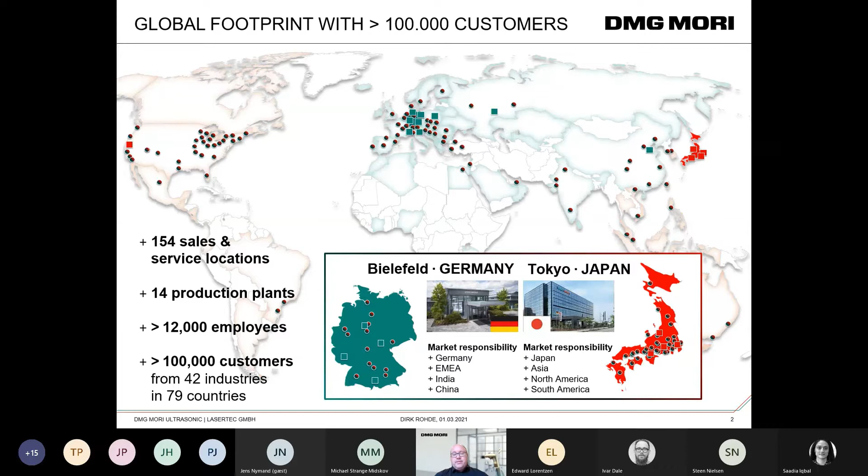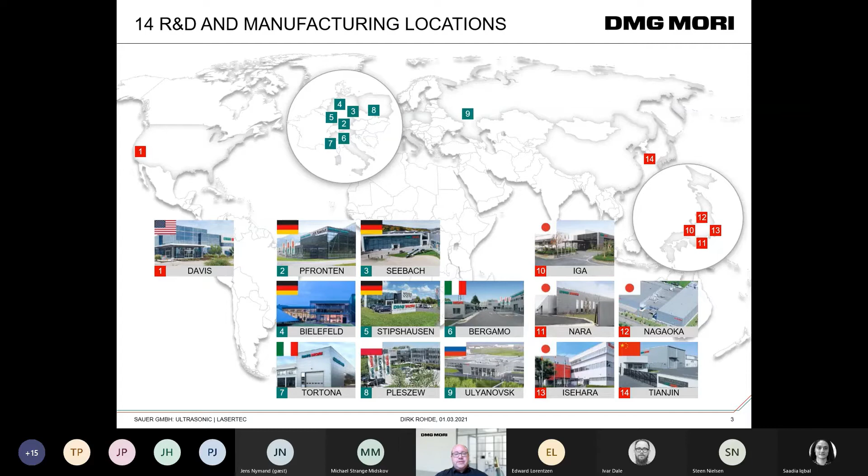Over 12,000 employees, over 100,000 customers, and many R&D centers for the different technologies for milling, turning, additive manufacturing, ultrasonic, SLM, and of course the DED technology, which is the laser tech fraction that is based in Pfronten in southern Germany.

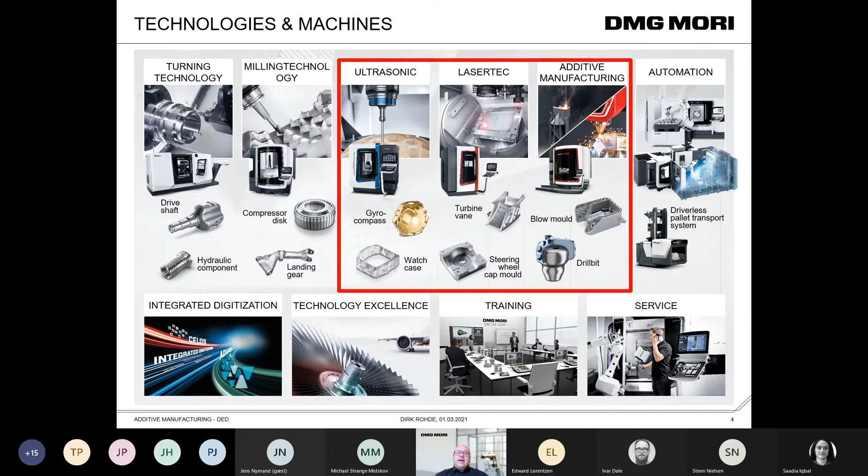In Pfronten, we do not only work for or with DED. We have many different laser machines in our portfolio. It's power drilling, it's shaping for texturing surfaces. It is a precision tool in which we finish PCD or CBN tools with a laser, as well as, of course, the DED technology.

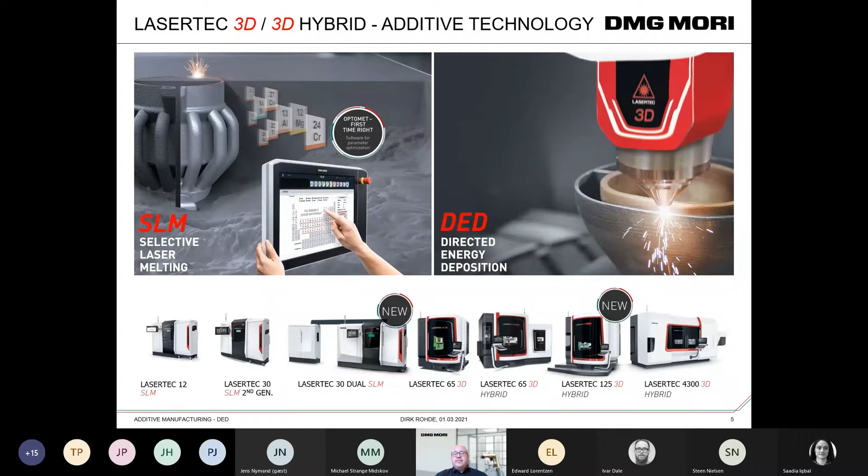For everybody who does not really know about the process, SLM is where you have a powder bed, typically the laser on top, and you have a 2D process. You weld layer per layer and add new powder to it. That is for very, very fine and detailed structures, but typically not for big parts. And you are hooked up to only one powder because you have the powder bed.

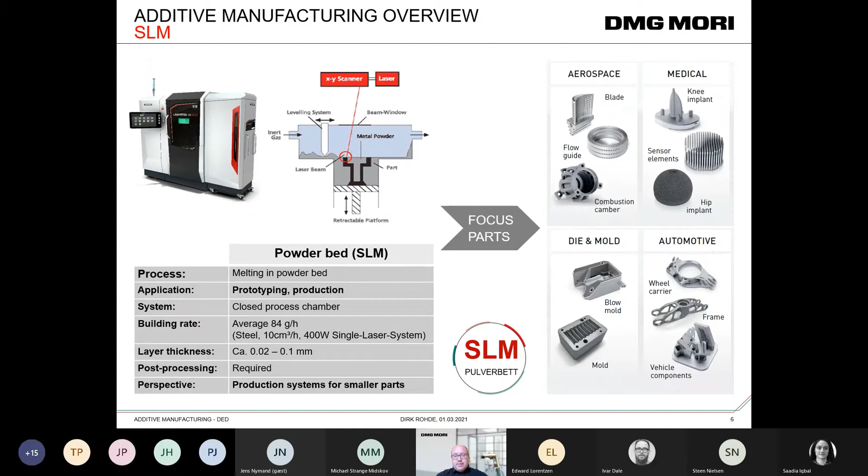The DED works differently. You have kind of a nozzle head in the center. You have the laser to bring the heat to result in a melt pool. There you blow the powder onto the melt pool, and that is more or less covered by a shield gas. So that's a laser welding process.

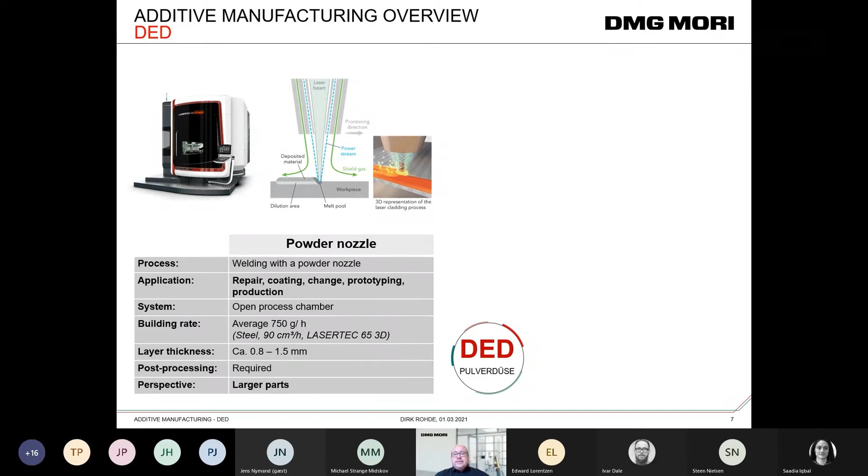Available in many different applications, later on there are robot applications available. Some have more the size of the part in focus. We focus more on the hybrid background of it. Hybrid means additive and subtractive in a wild mix. So first subtractive, clean destroyed areas, add material, and in the third step you finish the added material.

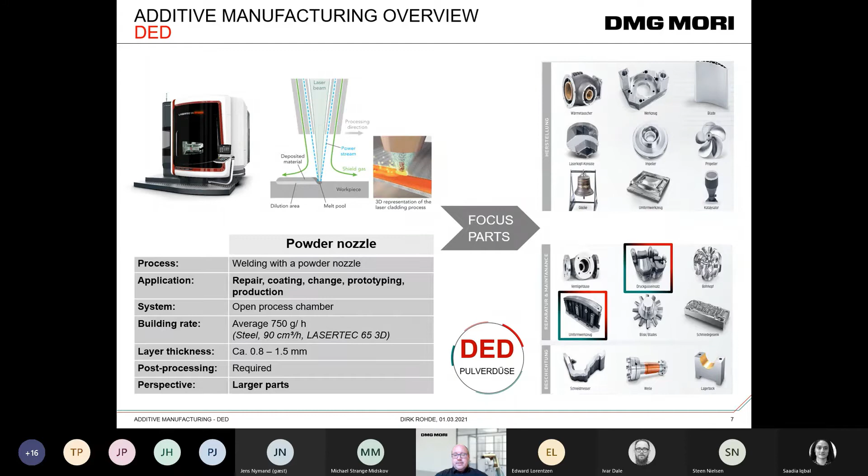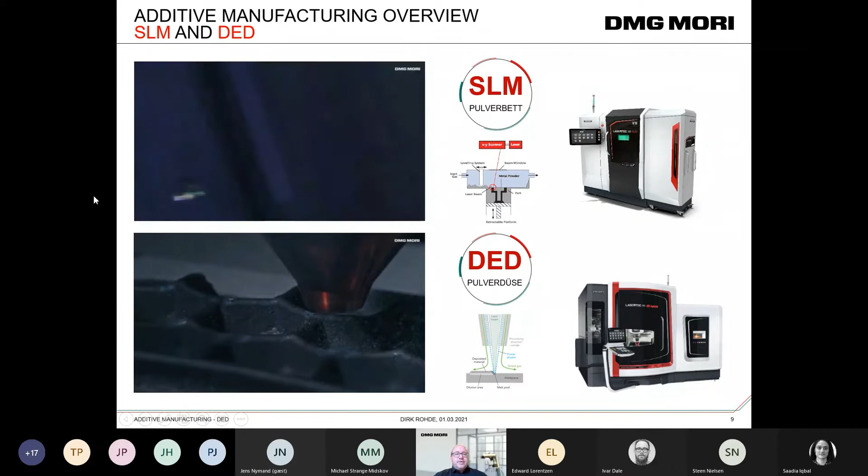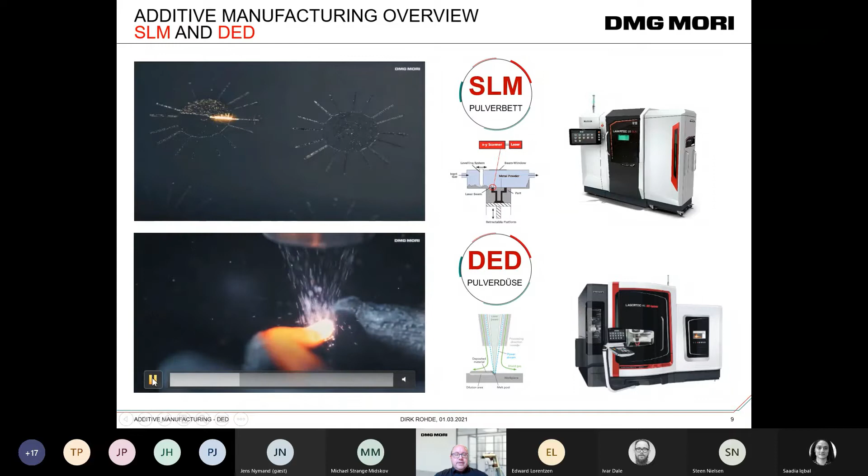Here's this typical SLM process where you add powder layer per powder layer, and then you weld the powder with the laser from the top. And this is the DED application where you really have a laser welding process where you shoot or blow the powder onto the melt pool and build your parts.

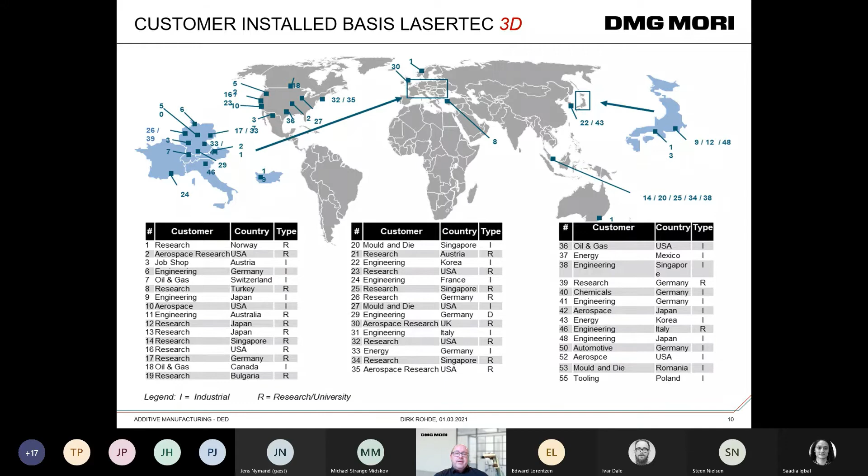DED is not a developing status anymore. This overview is a little bit over a year old. Right now we are at over 80 installed machines worldwide as a basis. The first customers, of course, were universities and research and development centers, but it's now definitely in the industry, and it's a weapon. You will see that later for every quick repairs, fine details, print out.

Here are 3 of 5 available Lasertec DED machines. They are all based on our 5-axis milling machines. So the hybrid, Lasertec 65 3D hybrid and Lasertec 125 hybrid, they are fully capable 5-axis milling machines with absolutely no restrictions or limits or no differences compared to a standard milling machine. That's a DMU 65 monoblock or a DMU 125 monoblock machine. Who knows our machines? We simply add the DED technology.

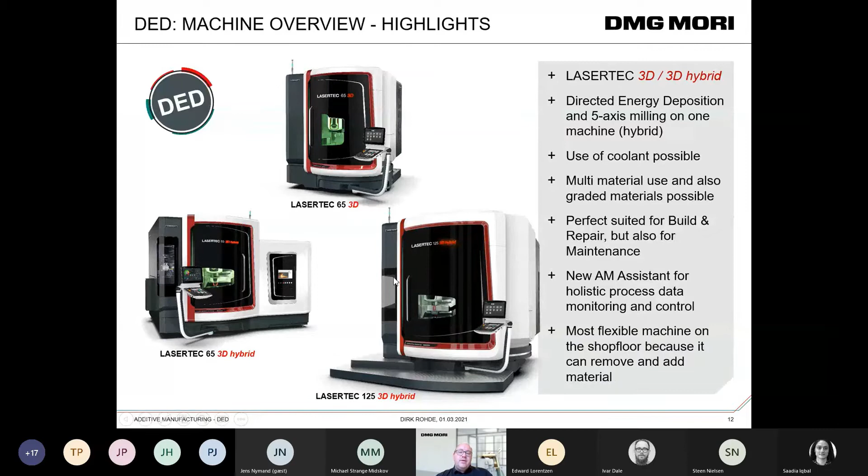On the right hand here, you see the attachment, because the machine housing itself is not big enough to cover the full laser head with the transfer module in there and the powder storage and everything. But the 125 is big enough that it was possible to locate everything in the original housing of the machine.

Working areas: hybrid 400 millimeters height, it's a little bit less than the DED only. This is a non-hybrid machine, it's only for DED works. That's resulting due to the laser head, we have a little bit reduced height and a 500 millimeter diameter roughly. And the Lasertec 125 is almost 750 and has 1250 millimeters in diameter, up to 2 tons.

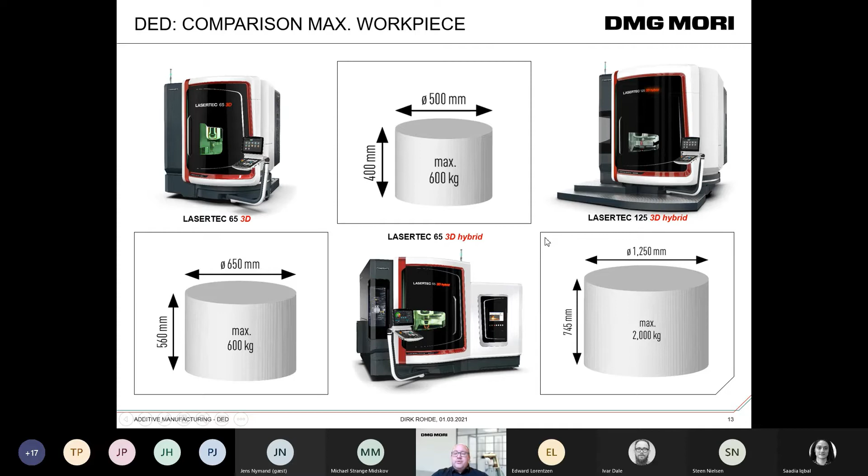We also have, that's brand new now, a first installation these days running in the United States. That's a turn mill center, up to 6 meters between the spindles, with a maximum diameter of 1070 millimeters. This machine, you see the relation or the ratio between the operator shown on the panel and the machine size, this is really, really big.

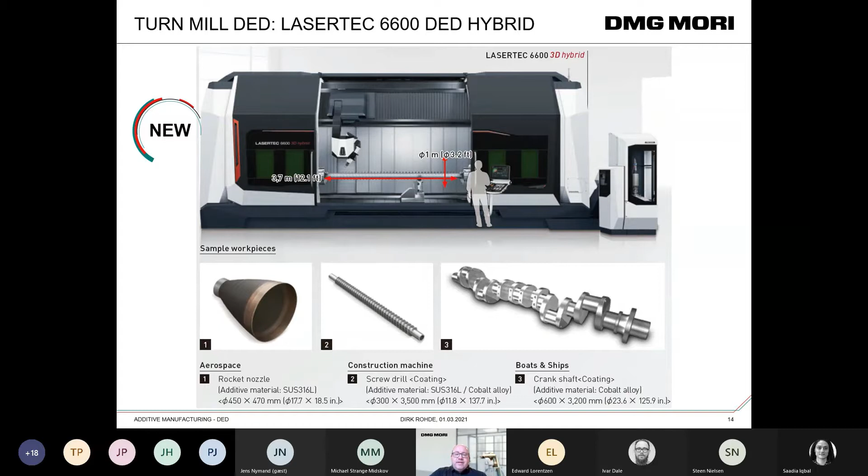Right now we see the focus on coatings, on shafts, every kind of shafts and crankshafts and whatever is long and requires a coverage. And this summer there's a new one upcoming, located between the 125 and the 6600. Few rough numbers - we have a world premiere in 3 months, so right now we do not show much more about it.

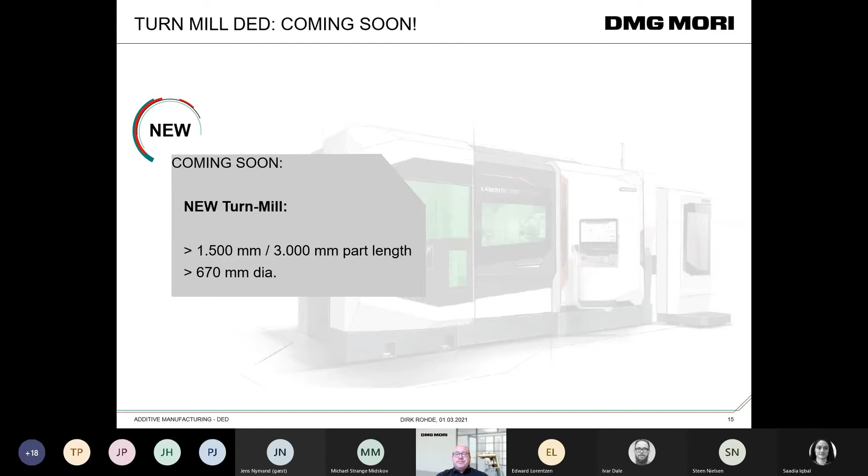Before we have a look at what the machines are used for, the use cases, I would like to point out a very important portion of this DED technology to make it capable of usage in your industrial environment.

The machine, the Lasertec 65, was presented in 2013 already, but over the last 7.5 years we found out that there are some minor mistakes which result in a bad part at the end. Now we are in a situation that we have almost everything monitored in the machine itself, and mainly it is all around the powder.

What we have is a powder mass flow calibration unit with a little scale in the back. So the machine is asked to, for example, feed 50 grams of powder, and we feed the powder and the scale is automatically weighing it and reflects the result back to the machine, so the powder flow is self-calibrated.

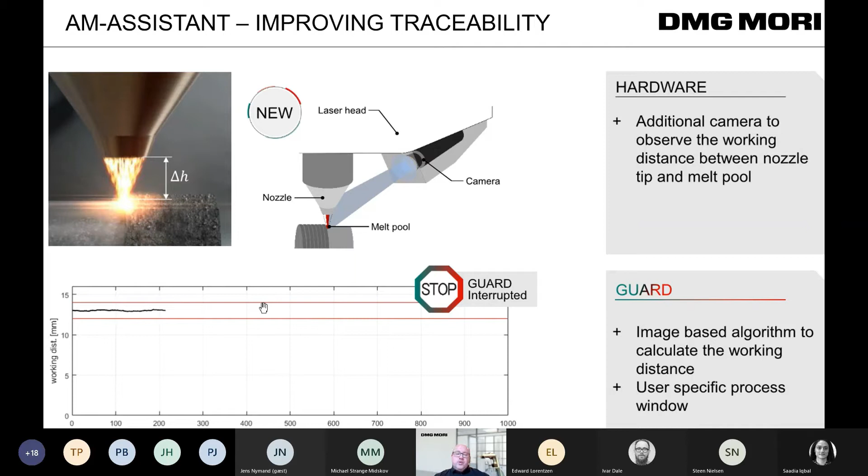Then we have the so-called working distance monitoring. You see here in the screen, I can zoom this up a little bit. When you add material, you can program this, which in this case is Siemens NX. You tell the machine, okay, with every layer you have an increase of, let's say, 1 millimeter. But if this is not right, and you have a full print of a part 200 millimeters high, and with every millimeter you have an additional 0.1 millimeter, after 100 layers you are way out of range. So the part grows toward the nozzle, and you do not have the melt pool anymore that you want. That's why the distance is controlled and monitored, and runs within a certain range, let's say between 12 and 14 millimeters. If it runs out of that, we assume that this is a mistake, and the machine will stop for safety reasons.

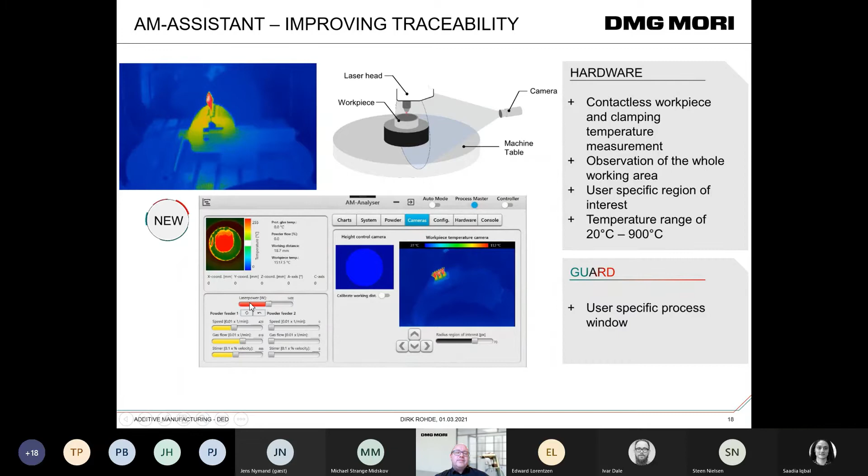And we have melt pool monitoring with a self-adjusting leveling of the machine during the process, and you can every time adjust your speed, your gas flow, as well as your laser power on the operator panel during the process.

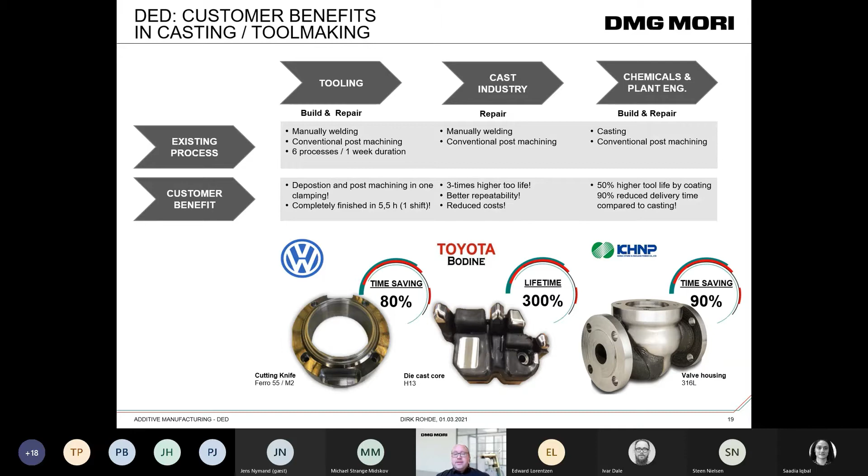Here are some samples for tooling. The cast industry, especially die cast industry, is extremely interesting for that, and as well chemical plants, etc. See, this valve housing is made for a chemical company. They have plants all over the world. Some of these housings are over 40 years old. Everybody knows these housings, and there are no casts available anymore, no drawings, nothing.

Old standard seals in there - everything was custom. So what they do is scan where it sits, and they have the distance between the flanges. They know the fixing points, and the rest of it they redesign based on standard industry norms, and simply print the same flanges and actualize the rest of the valve. This is a full print on the machine, in this case very special because it's a mix of additive and subtractive work. See it here in the right bottom, how it builds up from top down.

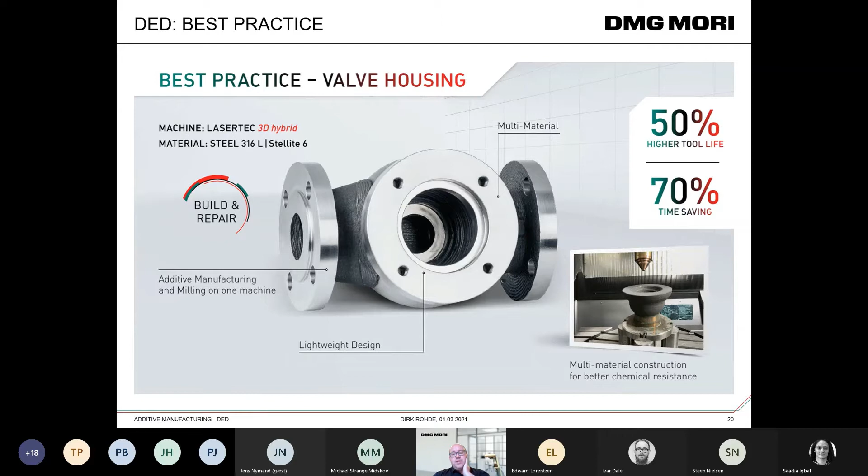Print time of this part is almost 30 kilograms, and it's 56 hours. So within 2 days you have a new machined valve as a replacement.

This one is extremely fast. It's a cutter knife repair setup on the machine. They print the soft base with the tool steel ferro 44, which comes out at 44 Rockwell, and then you have a so-called M2, a high-speed cutting steel. Typically you cannot weld high-speed cutting steels, but it's available as a powder and works great in the machine. So we have a 2 millimeter layer hard cover on this knife that comes out of the machine at 63 Rockwell, ready for installation back into the tool.

Total print time of this part here, including the hard coverage and machining, is 5.5 hours. So you get completely away from this machine tourism where you machine the destroyed sections off and move it to the next machine or the hand welding shop, then relax or stress relieve it and finish it. It typically takes this customer 3 to 4 days for replacement; with this case, it's replaced in less than a shift and ready for assembly.

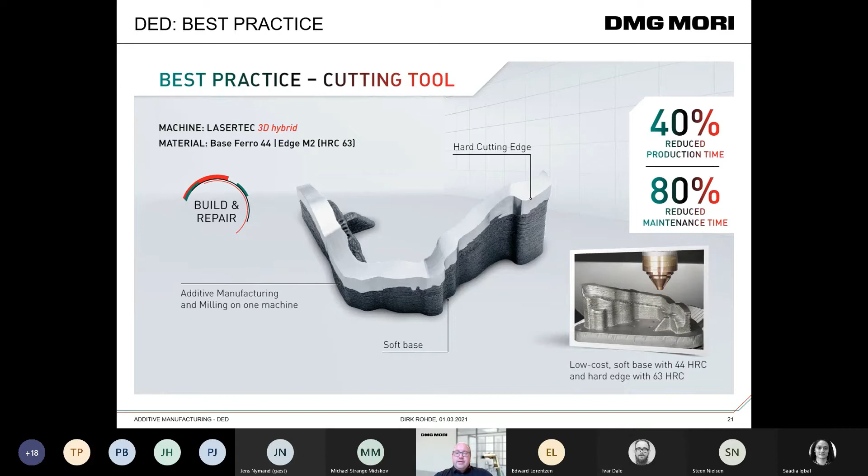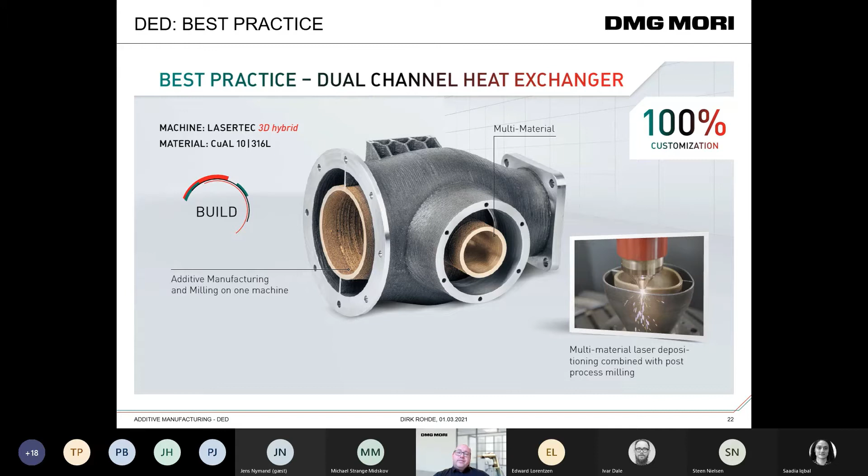This is a part we developed on our own, a tube in tube — one of the best samples. This technology is capable of handling, in standard, 2 different materials. Compared to SLM, where you have one big powder bed and cannot mix the powder, here we blow the powder to the nozzle, and due to this blowing process we can make a clean shot and then switch the valve to feed a second powder to the nozzle. So here you have a mix of stainless steel and bronze in the middle. It's a great combination, and right now we are able to mix up to 4 different materials. A few slides later I can show why it might be interesting to use a powder mix.

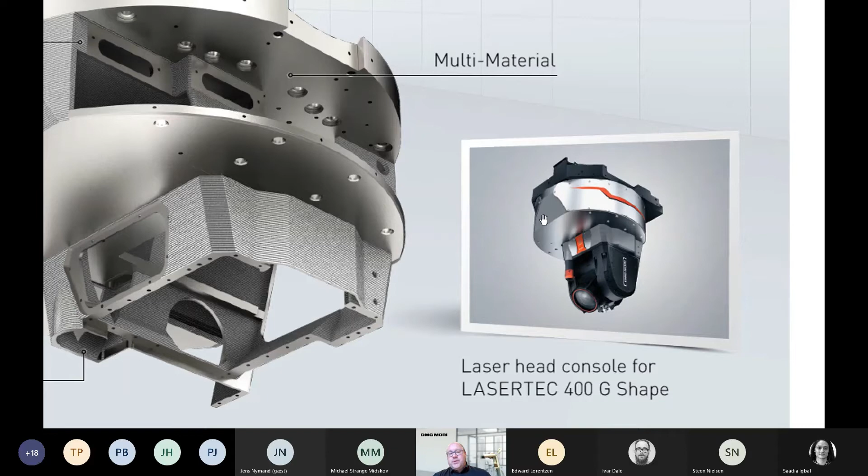This is a part we printed for one of our own machines, a Lasertec 400G shape machine for texturing molds, surface texturing of molds. We print everything you see here, and our build plate is the big base plate. On the right bottom you see the finished part. We keep it with a rough surface, as you can see, because it's our own product too, so it gives us a little advertisement and coverage. But the intention was to have a lightweight, very functional machine part to carry the laser optics on the machine, on the spindle position.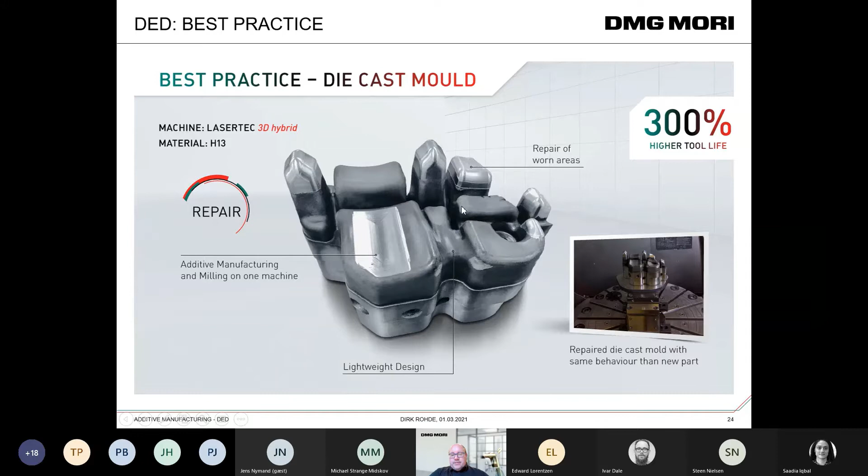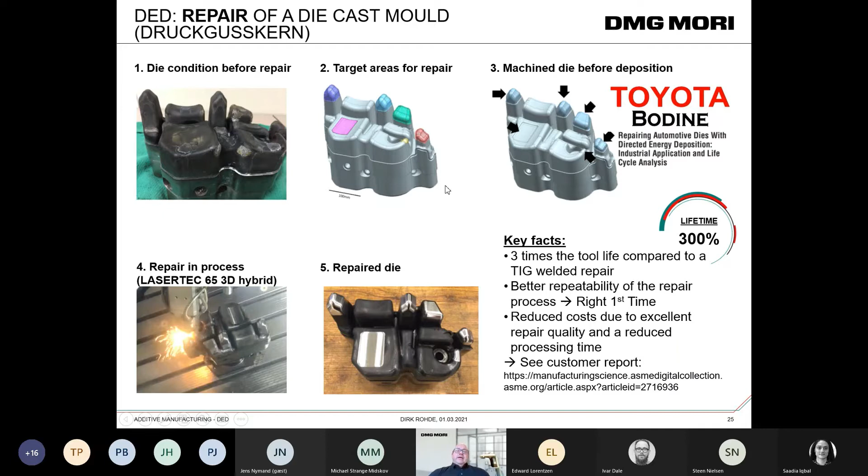This is one of the most interesting parts for repairs: die cast molds, die cast cores, and everything. The core comes used into the machine — top left is a used part. We focus on the sections where the highest wear of the part is. We get the surface material up to 3 millimeters off, add the material, replace the used and broken sections, and finish it in the machine. It's an extremely fast, highly reliable repair of these molds in one shot, one machine, with only one clamping position. It saves so much time, and due to that so much cost, plus the possibility of using a harder material than the core is itself typically. We work here with M2, 63 Rockwell, giving 3 times higher lifetime of the part.

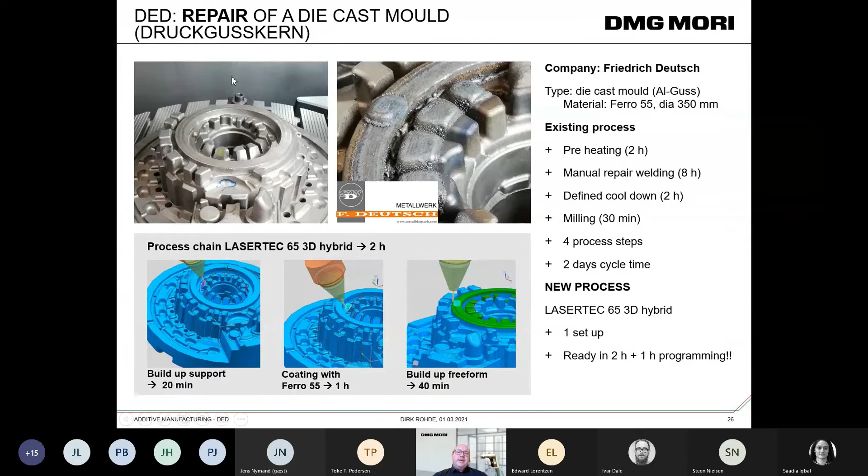In this case, you have a die-cast core with used sections, and what you see here is that we subtract — we mill the used sections away, then add the material and finish it in one machine. The existing process is preheating for manual repair welding, then cool down, milling again, a total loss of 2 days to repair this core. On our machine you have only one setup: you put the core in, machine it off, weld it, have a few minutes cool down, and finish it in the milling process. Why is preheating not necessary? The heat impact of the laser is such a small dot that the overall heat impact on the part is very little, so you typically don't have too much stress, compared to manual repair welding, which is also very rough — you weld big areas, lose many details, and everything has to be machined off again.

This is the same, probably better shown in the pictures. Top left in red is the focused item that has to be replaced. Top right you see this empty space — this rib has been removed by a milling tool. Then we add the item again, and bottom right there's a finished section with a fully repaired rib in this tool. This company, Friedrich Deutsch, is located in Eastern Austria, and only for die-cast repairs they have had, since last year, 3 Lasertec 65 machines to do exactly what you see in these photos.

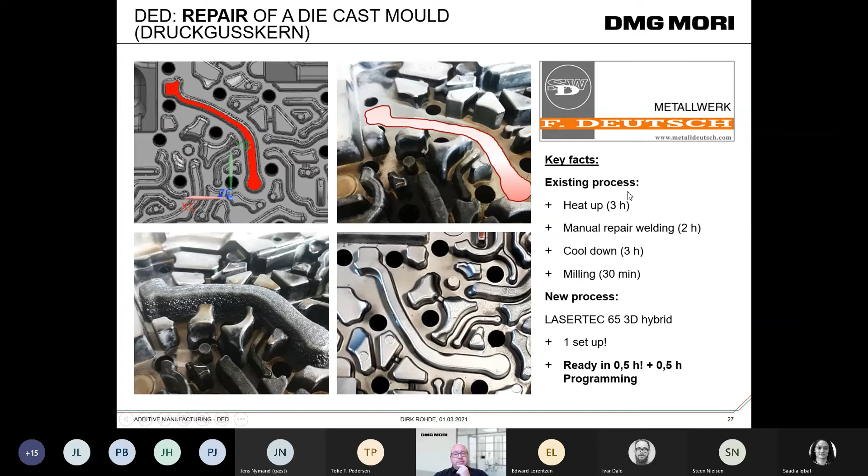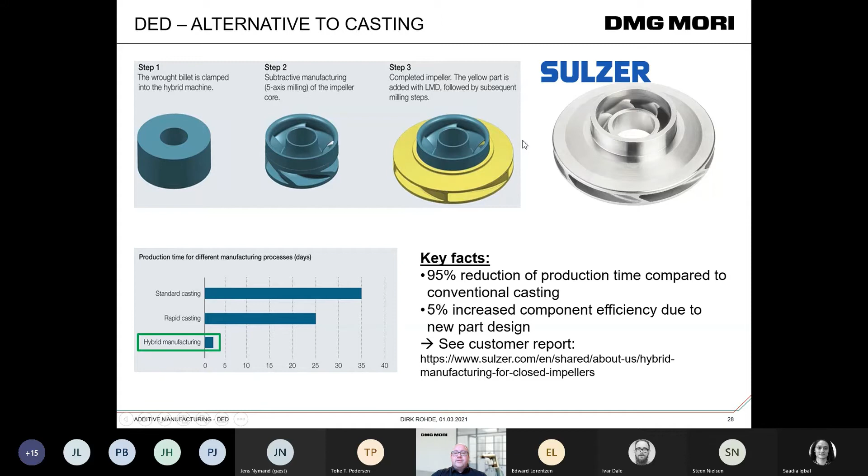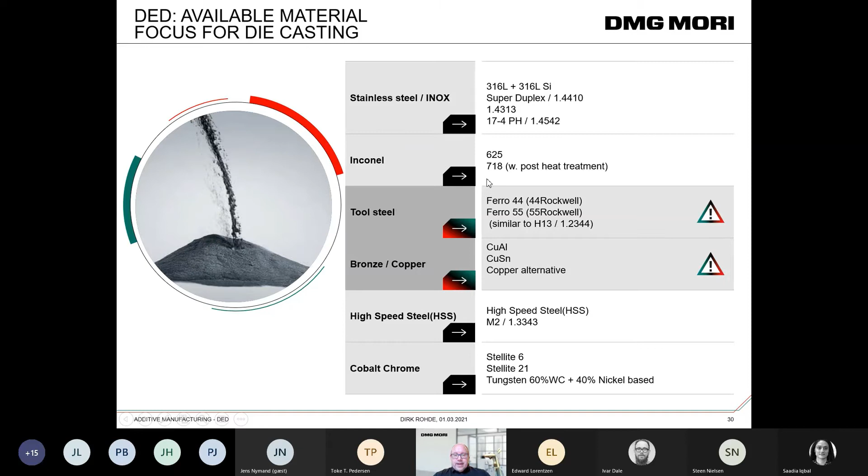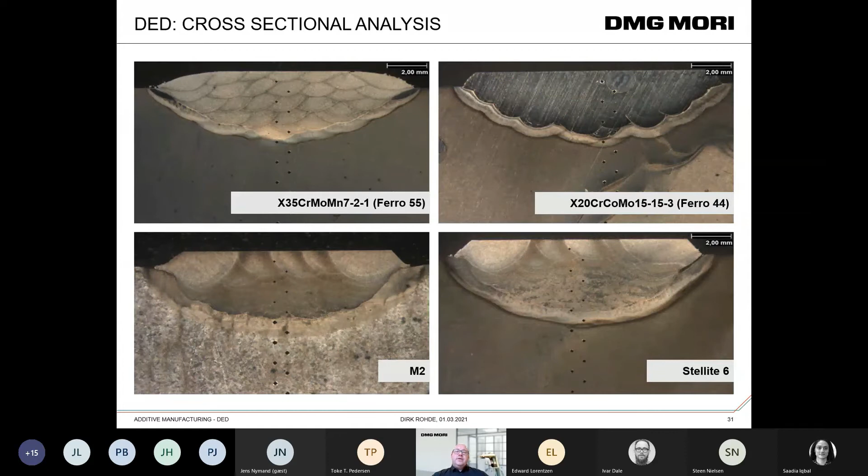One keynote on that: the powder for DED is much bigger than SLM powder. Typically it's not airborne - we recommend a mask and gloves because there might be smaller particles, but typically the smallest ball size is 55 micron. The maximum ball size of SLM is typically around 40 micron, so the powder is much rougher.

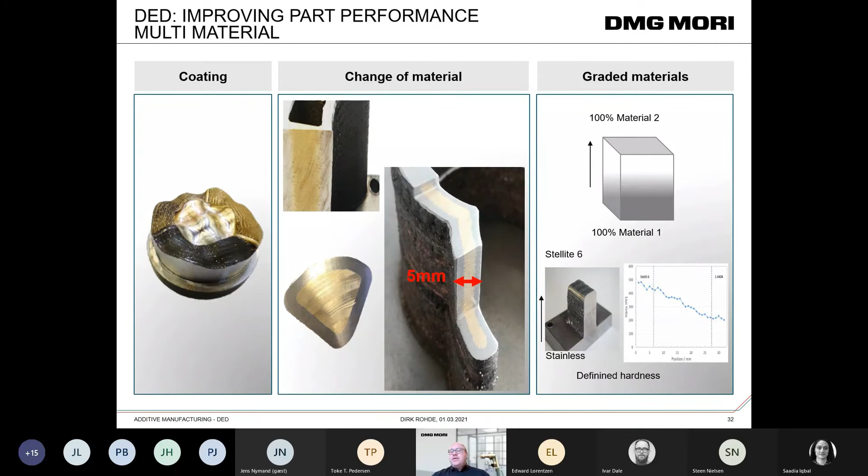I have to speed up a little. Here you see material mix right in the middle - this stainless steel copper mix again. It's always a great combination, and you can change the material layer by layer. On the right side there's so-called graded materials, where we fade the material - at the bottom you have maybe 100% stainless steel, and you fade over to a tool steel for an extremely smooth transition, or take austenitic and non-austenitic steels to increase the magnetic force of the item. Many functions are possible.

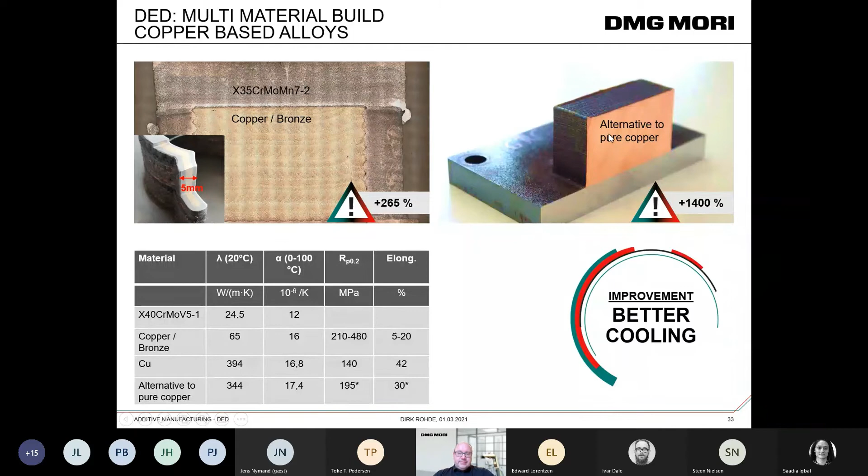Then there's a special kind - sorry, I'm missing the word - the copper bronze mix. That's very often used - bronze as an alternative to copper. It's a little more rigid, and it's very often used in combination with die-cast cores, combining a hard surface support with bronze, and cooling channels within.

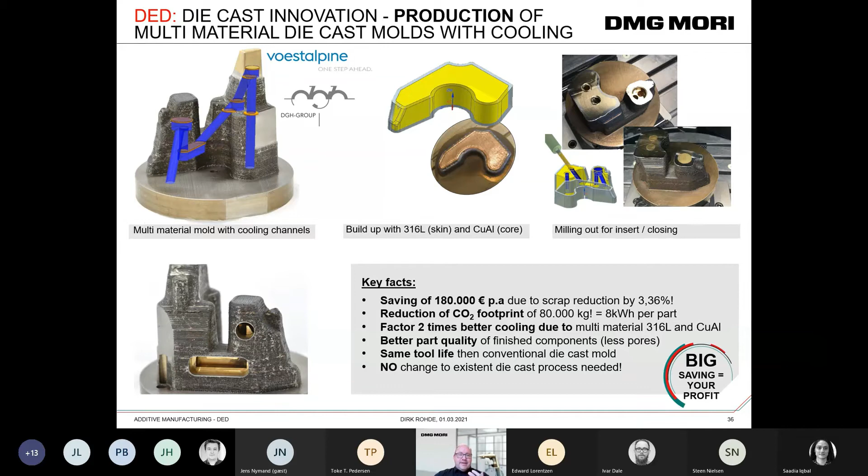It's just a rough overview. If you're interested, contact us, especially for die-cast molds, repairs, coatings and everything. It's a real weapon.

Different thinking here in the middle from Schaeffler - that's a DIN norm standard part from a catalog. In the past they had a block of steel and machined all around these little rods away. Now they think the opposite way - they have the base plate and simply add the rods and then finish it. Saves 70% of the time again.

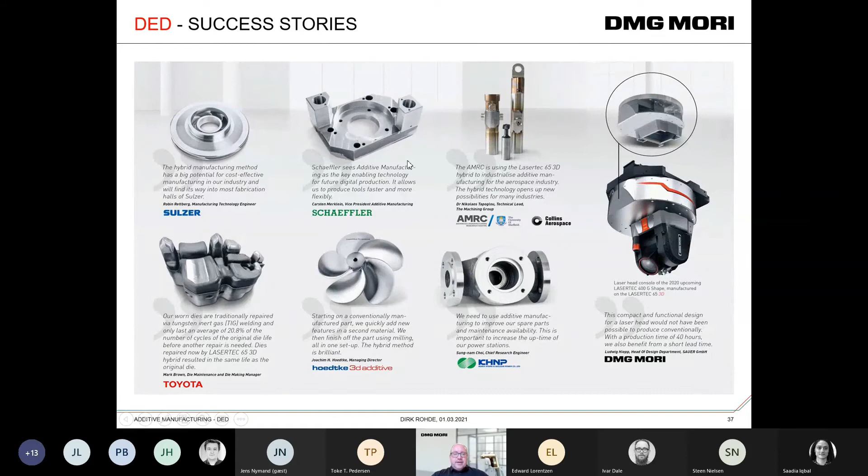So that was me. I hope it was interesting and not too fast, with many details but not too many. I'd be happy if you have any questions or require further information - feel free to get in contact. I believe Ivar will share contact data as well as the webinar itself. And I'm now curious what I can learn from the other speakers. Thank you very much.

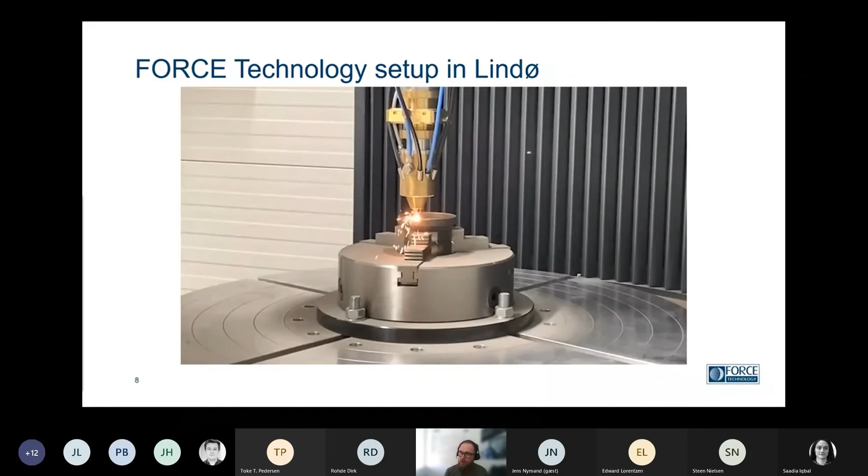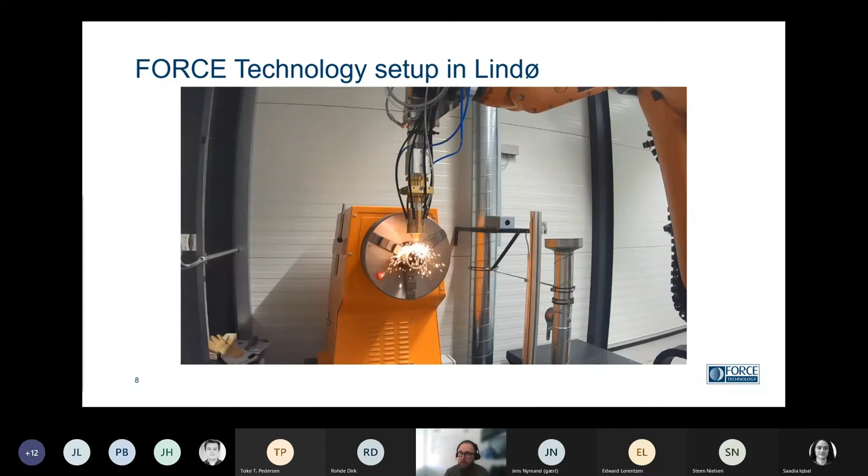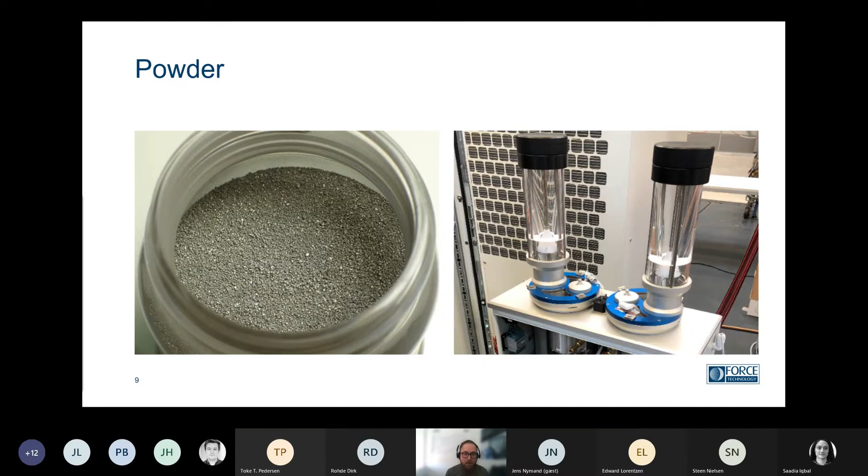I'll jump over because a lot of you know we also have a similar setup in Lindø, but it's not the same - it's used on an industrial robot instead. We have a deposition rate of up to 10 kilo, and as Dirk mentioned, we may have the higher focus on size definitely, but it's the same principle of laser and powder welding. We use the same setup - we have 2 powder feeders, which means we can use the same material in both, or mix them if needed. So there are a lot of possibilities with the materials there.

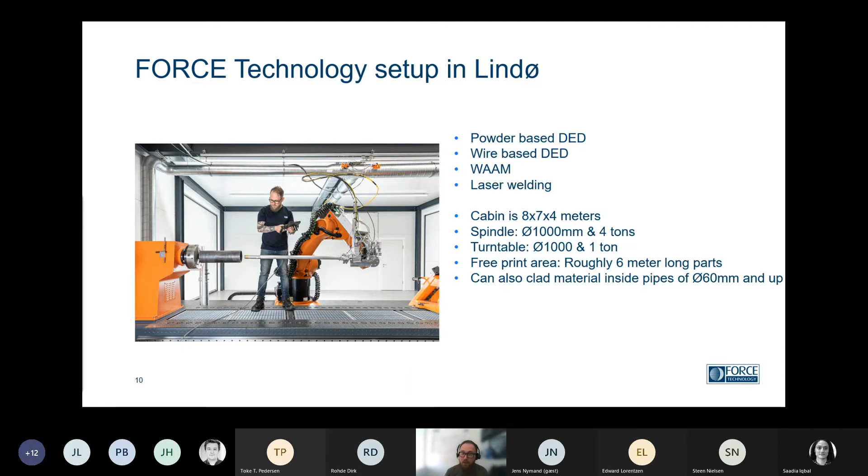We can also do cladding on the inside of pipes, with powder-based DED. We can also do it with laser and wire, or with arc welding and wire, but we can also do laser welding. So our machine - not to compare it to DMG - but our machine is maybe a more multifunctional machine. We do aim for the big size and a lot of remanufacturing as well. So if there's any question on our setup or DMG machines, feel free to come with some questions if you have.

My name is Steen Nielsen. Hi Steen, can you hear me? Yes, we can. Try to put the camera on - it's not... I think the camera is on now. Yes, I can see you.

My name is Steen Nielsen. I'm a colleague of Ivar at FORCE Technology, and I've worked with laser technology for many years. I have a few questions for Dirk. Thank you, Dirk, for a very nice presentation - I'm very impressed with your equipment.

I think it's now more than 40 years since the first laser cladding was demonstrated, at that time with CO2 lasers. Even though it was very primitive compared to what you can do today, it has been utilized industrially on a small scale over many years. But due to development of technology, high-class equipment is now available, due to development of lasers, powder nozzles, fiber technology, and also computer technology and programming. That's why we now have these very impressive machines.

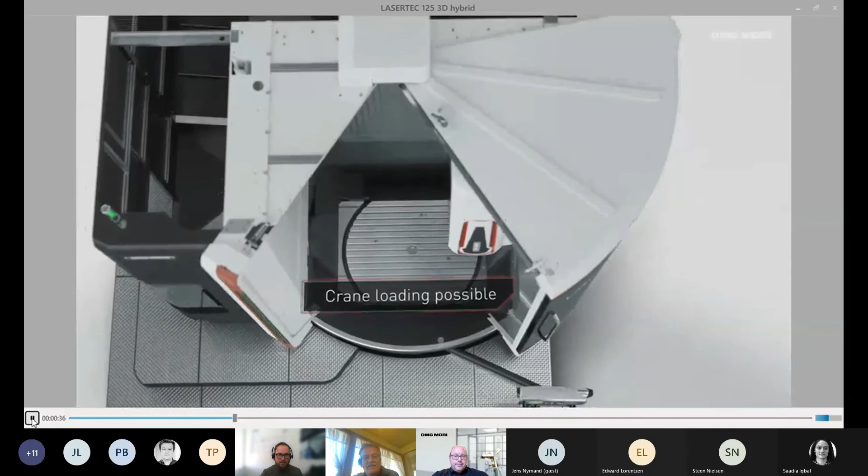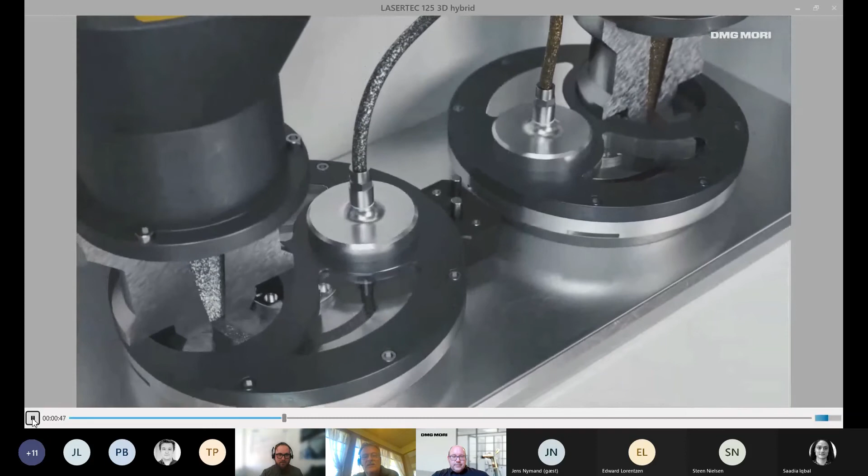Okay, and this is your own design? Yes, that is our own design. Okay.

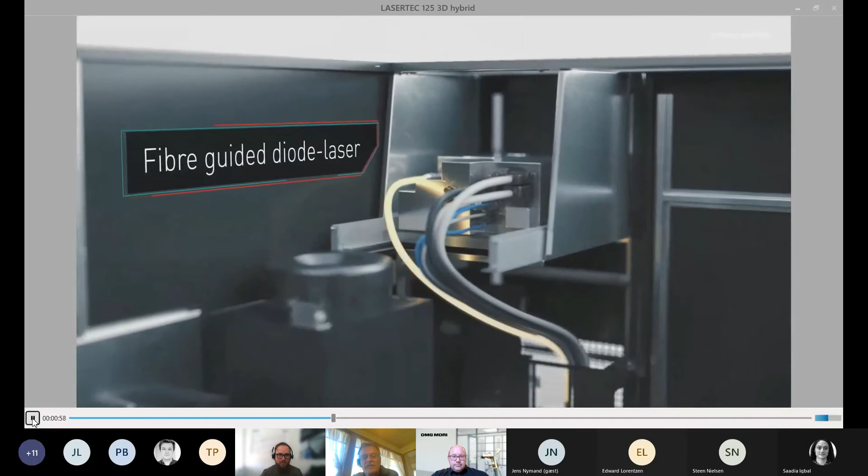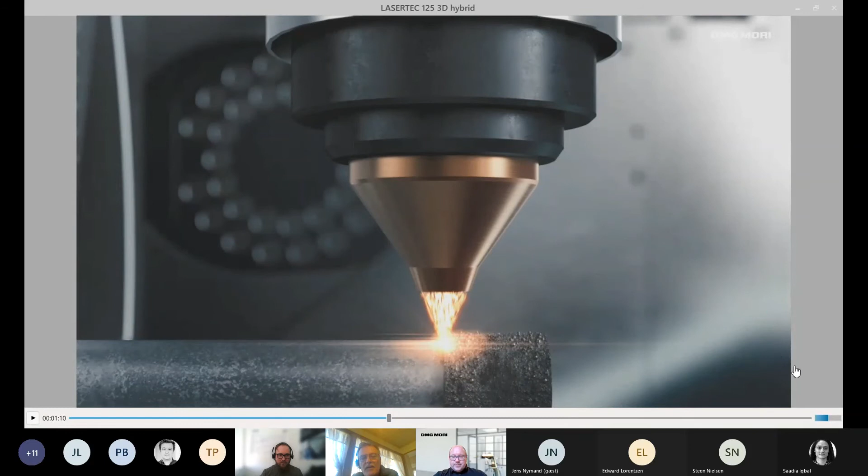You have 2 powder ports - oh there's more than that, yeah. So there we go, here we're back again. So you have different kinds of nozzles, so you can... yeah, exactly, with different ports.

I don't know if other people want to ask questions, but let me move to materials. You showed some very good materials you have experience with. If you could give me 3 materials you would not recommend using, could you do that? For example, do you have experience with aluminum or other materials where you have difficulties? Tell me so we don't have to start there.

Yes. Due to the fact that our machines are based on 5-axis milling machines, they are sealed for coolant water, but not sealed for gas. The build chamber is extremely big due to the machine size. Therefore it's not possible to work under a 100% shield gas environment like argon, and reactive materials like titanium and aluminum are not possible on this machine. That's one of the most important limitations for that machine.

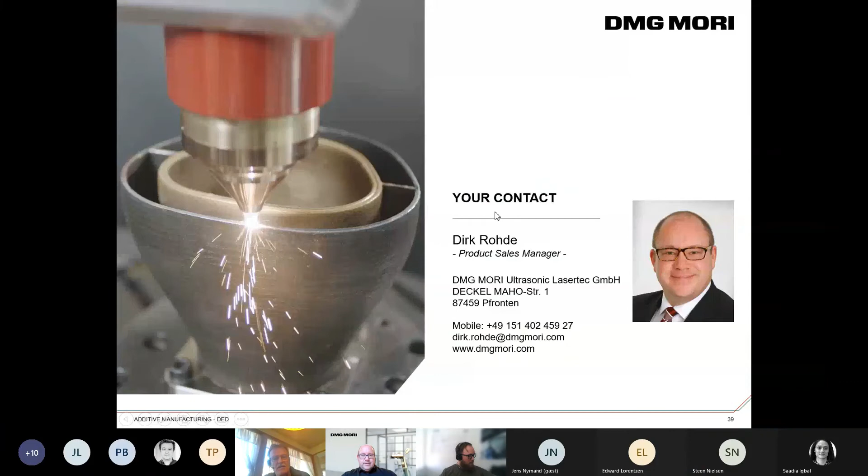Yeah, we have this - I would like to share this again. Yeah, I can see we have 2 questions from the chat and we're about to run out of time. So okay, this was my last question.

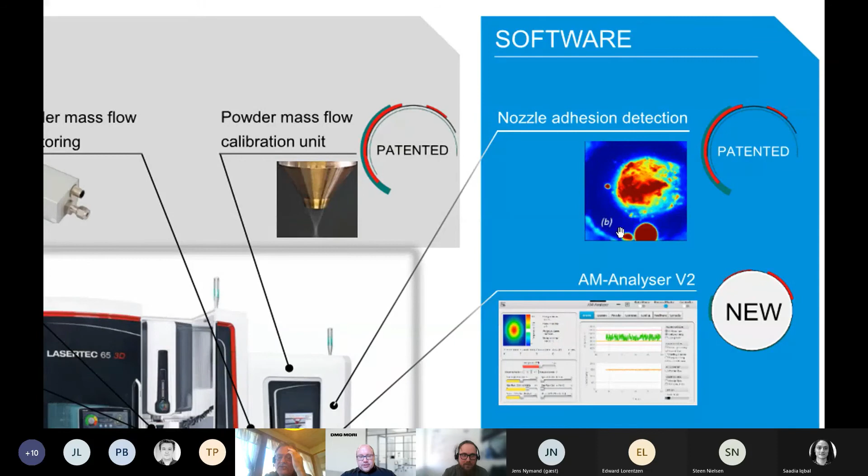That's fine, there we go. We have this nozzle adhesion detection - with a camera looking through the center of the nozzle we can detect, and here at the bottom you see these 2 red balls, that's sticking particles. And the shielding glass on the nozzle - that's at the end of the nozzle. The shielding glass, when you have the nozzle here, is way behind it, not in front of the nozzle. Typically we don't get much trouble with the shielding glass.

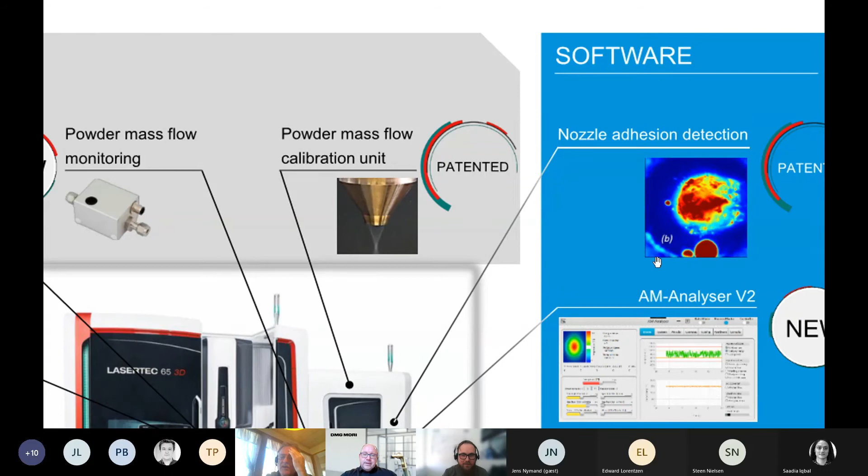This is a real attachment to the end of the nozzle, what you can see here. In a typical production environment you don't get this very often, but when you're in research and development, trying different powders or many new situations, it happens more often. You can adjust how big this is allowed to be, because a little bit doesn't affect your powder stream a lot. But as soon as it starts growing, it will direct your powder to a different spot - you need the powder in the melt pool, but with the adhesion your powder is blown elsewhere, not to the melt pool, so your welding result will be bad.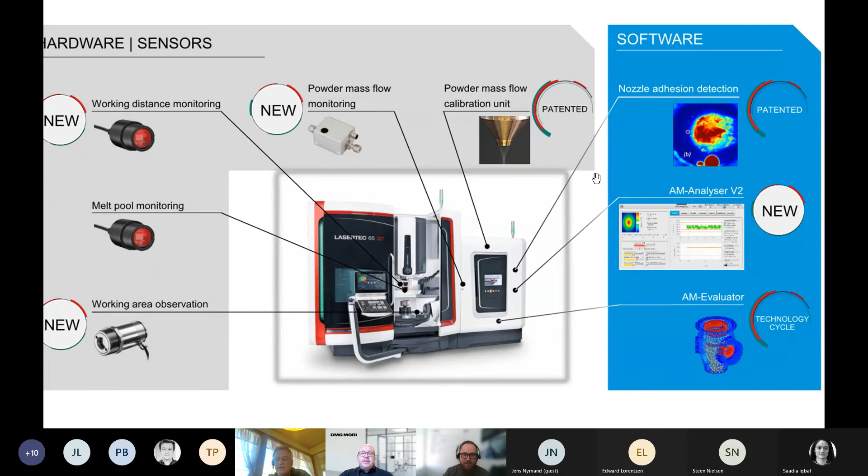Okay, yeah, thank you. The glass of the optic you typically change only within the yearly maintenance. Thank you, perfect, thank you very much for your insights, Sten. It's always a pleasure - let me share my screen again, and we have 2 questions from the chat.

Is there any difference in material isotropy between WAM and DED, particularly tensile strength and elongation? It's minimal - almost none. Due to the high process stability and existing, developed parameters, it's not better or worse than what you can do with other weldings. It's a real welding process. I jumped over this a little bit - you can see it here.

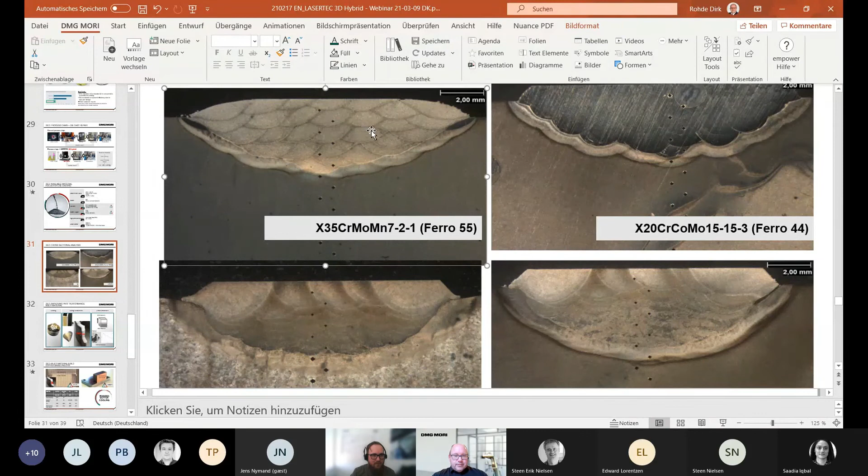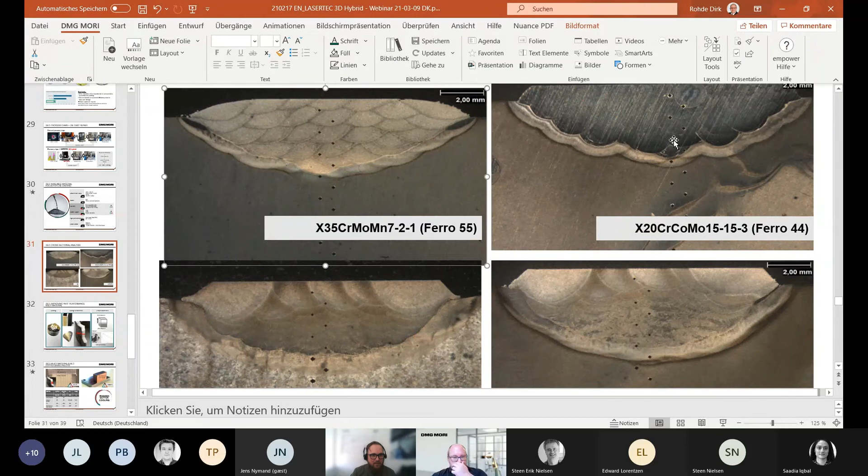You see here the different lines of the welding process itself. Don't be scared about the dots, it's from hardness testing, how the hardness affects.

It's a typical stable welding process, and it's reliable. Once the process has been figured out, you can throw one part after the other and really manufacture, coat, repair on an industrial basis. You don't need to care about any process parameter or whatever that it might be worse.

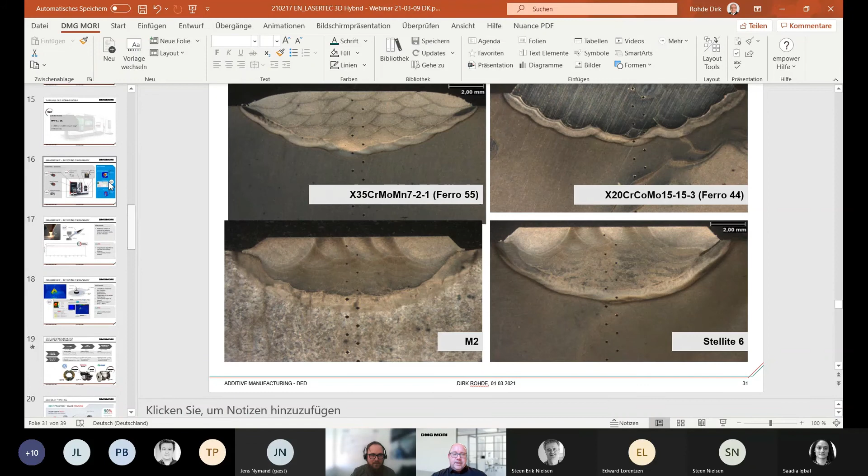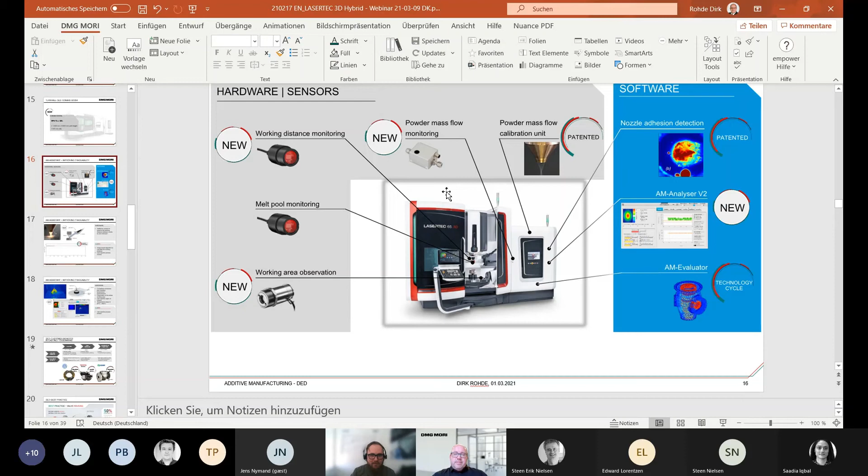What it can affect is what we try to prevent with our calibration, that we are sure that always enough powder is coming in the right amount, that the powder mass is correct, that we have the right nozzle distance to the part, and that the melt pool is...

Still, you can see that — whoop, that was a little bit fast. You can see that here. You can even see in which direction this is moving. Yeah, so precise it is. Once the parameter, everything has been checked and the process is running, then it's a very reliable welding process.

We also have the same type of camera to ensure that we are getting enough of everything. Thank you. So yeah, Satish, I think that's an answer. It doesn't affect the result — it's an isotropic result, very stable.

Magdalena, one of my coworkers, is asking, how do you ensure a smooth, defect-free transition between one material and another, for example avoiding cracks because of various thermal expansions? Which parameters do you focus on in order to avoid defects? Yeah, that's a good question.

The point on that is it's simply testing. All materials you have seen, the combination is possible. So coverage with M2 on the ferro steel and working with bronze, that all works really good together. The stress is certainly a question, but the stress is not as big as you know it from probably hand welding, as I already said. The heat impact of hand welding is much higher than working with a 1.5 millimeter melting pool.

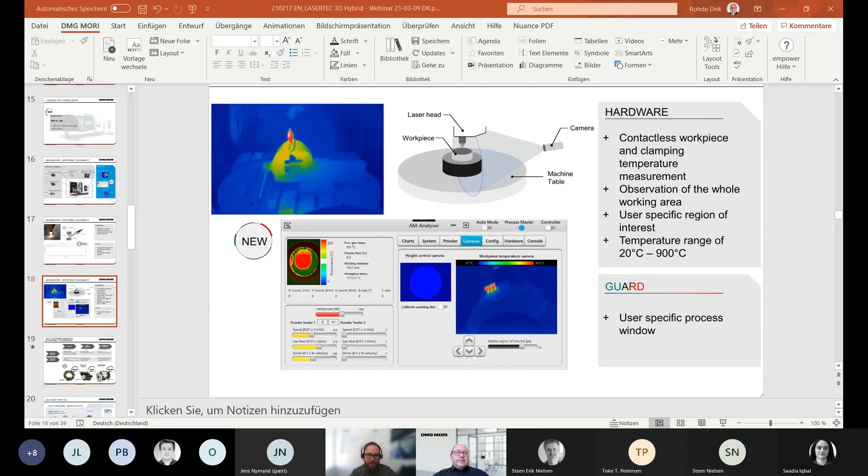Did that answer your question, Sten? Yes, perfect. Then I think we'll wrap up, we're a little bit on overtime, but that's fine, people are still in the meeting, so apparently it's fine.